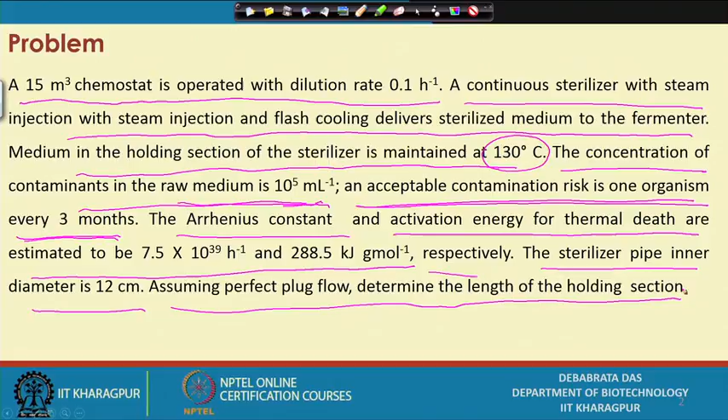So we can easily find out, since we know the flow rate, how much organism out of how much organism will be allowed in this particular sterilization process. The Arrhenius constant and activation energy for the thermal death rate constant are estimated to be the two values given respectively, and the sterilizer pipe inner diameter is 12 centimeter. Assume perfect plug flow and determine the length of the holding section. So this is the problem given, let us see how we can solve it.

As I pointed out before, when we try to solve the problem, first we should jot down what parameters are given. This is the volume, 15 cubic meter, dilution rate is 0.1, the Arrhenius constant is 7.5 into 10 to the power 39, the deactivation energy required ED is 288.5 kilojoules per gram mole, temperature is 130 degrees centigrade, and diameter of the tube is 12 centimeter. We shall have to write down all these things.

Now if you look at the dilution rate, how do you define it? Dilution rate equal to F by V. So F equal to D into V, am I right? This is already what is written here. So from D, the dilution rate, and the volume, we can find out the volumetric flow rate of the liquid. Now the linear velocity, how can you calculate it?

Suppose in the pipeline this liquid is flowing at 1.5 cubic meter per hour. If you know the cross sectional area A, and divide by A, what will be the unit? Meter per hour. That I can do. So this is exactly what we have done.

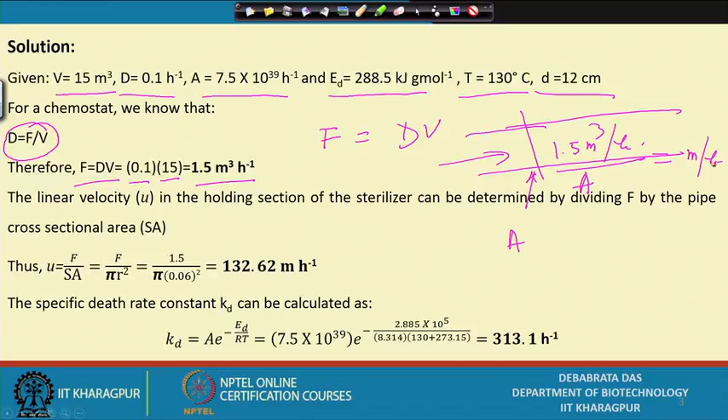This is the flow rate, and this is the cross sectional area, pi r squared, and the diameter is 12 centimeter, which is equal to 0.12 meter, am I right? This is in cubic meter, so radius will be 0.06 meter, squared, and your velocity is coming about 132.62 meter per hour. Now we know the Arrhenius equation.

What is the Arrhenius equation? Kd equal to A into e to the power minus Ed by RT. That is what is given here, am I right? A is the Arrhenius constant, Ed is the deactivation energy requirement, R is the gas constant, and T is the temperature of sterilization. So all parameters are given here, so we can easily calculate the death rate constant.

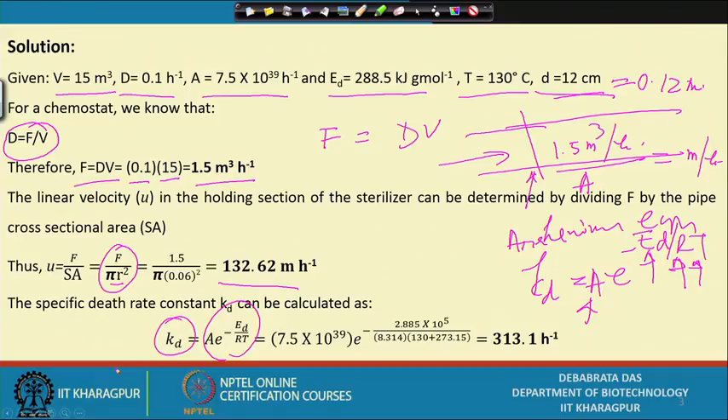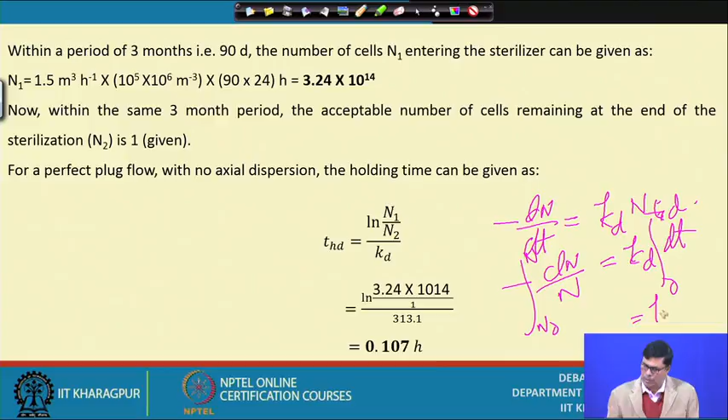Now once we know the death rate constant, we know the equation that we have: dN by dt equal to kd into n, am I right? So this is dN by n equal to kd into dt. So this is n0 to n, and this is 0 to td, or the holding time t. So we can write this equal to kd into t, and we can write ln n by n0, and this is minus. So I can write ln n0 by n equal to kd into t.

So time will be what? Time equal to ln n0 by n divided by kd. So this is what we have written here.

So first we shall have to find out what is the value of n0, am I right? How can we find out n0? The 3-month operation, 3-month operation means how many days? It is 90 days. 90 days, how many hours will be there? 90 into 24 hours, and the flow rate is 1.5 cubic meter. So if you multiply by this, you will get how much volume of the liquid we shall have to sterilize, and from that, knowing the concentration of organisms, if you multiply, we will find how much total microorganism is present in the media in a 3 month period.

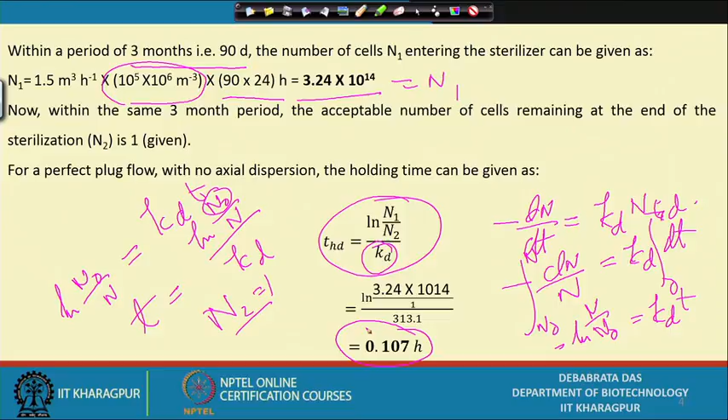So this we can consider as n0, am I right, or n1, whatever you have, and then we can put this value, and out of 1, n value will be 1. n1 value is this, and this kd value already we determined. So we can easily find out what is the time required for the sterilization, the holding time required, that we can easily calculate.

Now, our problem is something different. We are injecting the steam. This is media, and here is the steam. Then it is coming to the holding section. This is the holding section, so question comes here.

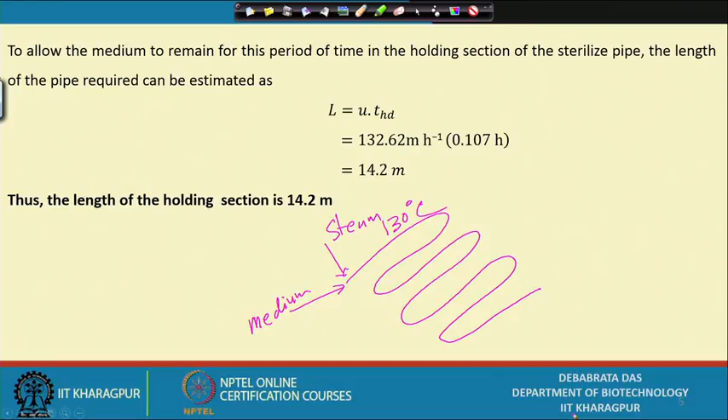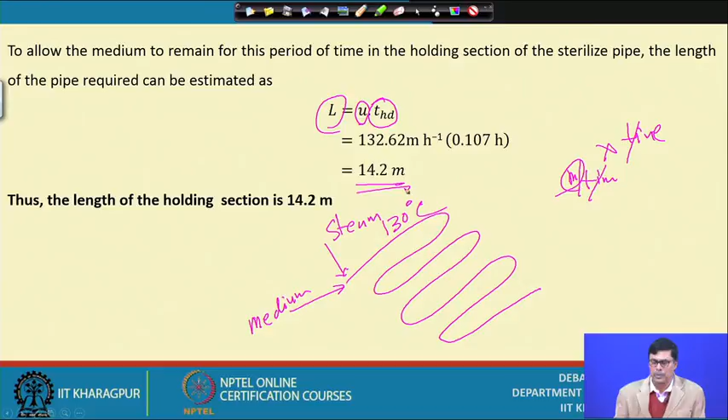This holding section, we want to maintain the temperature at 130 degrees centigrade. Now the question comes, what should be the length of this holding section? We know the velocity u, and the time required in this holding section. Velocity has units of meter per unit time, and if you multiply it by time, the time will cancel, and we will get the length of the holding section. So we will get about 14.2 meters. Very easily we can find out the length of the holding section of a particular sterilizer.

Now let us go to another problem. I think if you look at this problem, your conception will be a little better. The media at a flow rate of 2 cubic meters per hour is to be sterilized by a heat exchanger with steam in a continuous sterilizer. The liquid contains bacterial spores at a concentration of 5 into 10 to the power 12 per cubic meter. The activation energy and the Arrhenius constant for thermal destruction of these contaminants are 283 kilojoules per gram mole and 5.7 into 10 to the power 39 per hour respectively.

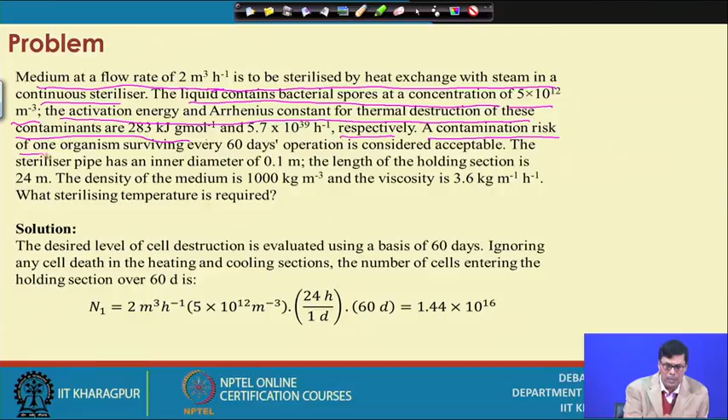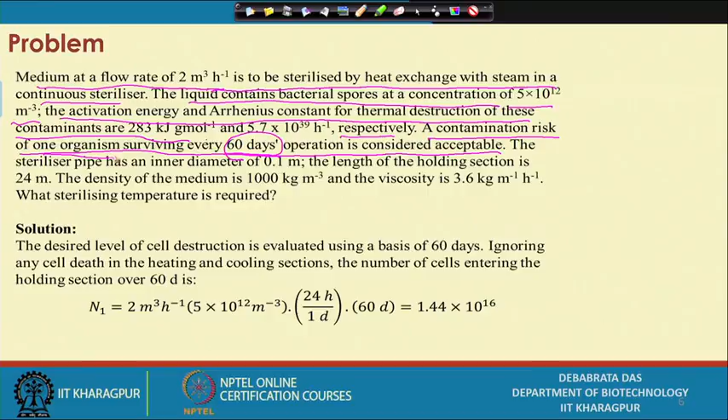A contamination risk of one survival every 60 days of operation is considered acceptable, because in the last problem we had 3 months, and in the last problem we tried to find out how much population is there. With 3 months operation we did it, and this is similar, but with 60 days. So a contamination risk of one organism surviving every 60 days of operation - every 60 days we are allowing one organism to percolate through the sterilizer, and the sterilizer pipe has an inner diameter of 0.1 meter and the length of the holding section is 24 meters.

In the last problem, you can remember, we tried to find out what is the length of the holding section. Now here the length of the holding section is given, 24 meters, and the density of the media is 1000 kg per cubic meter, same as water, and viscosity is 3.6 kg per meter per hour. What we shall have to find out is the sterilization temperature required for sterilizing the media. So this problem is a little different compared to the previous one.

Now let us see how we can do that. The desired level of cell destruction is 60 days. So like previously, we have 60 days of operation, and what is the flow rate? 2 cubic meters per hour. Now 2 cubic meters per hour means you have to find out the flow rate per day. 1 day is 24 hours, so if you multiply by 24 hours, you get meter cube per day. Then you multiply it by 60 days, you get how much cubic meter of liquid you are handling. And this liquid has a microorganism spore concentration of 5 into 10 to the power 12. If you multiply that, you get the N1 value as 1.44 into 10 to the power 16.

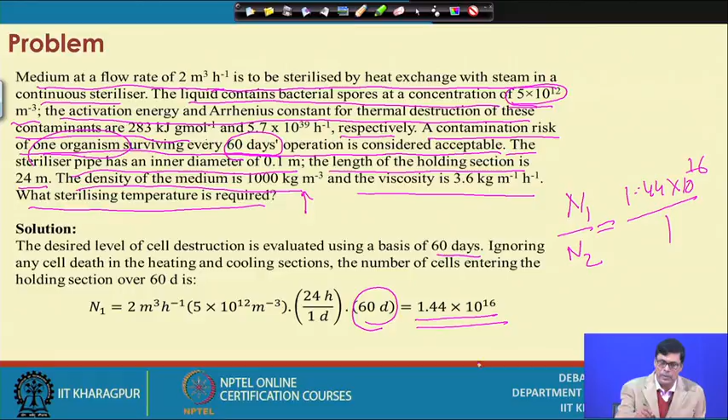Now if you want to calculate N1 by N2, what will this be? This will be 1.44 into 10 to the power 16 divided by 1. So the ratio is like this, and we can easily find out the ratio between N1 and N2. Here it is done the other way, N2 by N1. So you divide by this, and we get the ratio as 6.9 into 10 to the power minus 17.

Now the question comes, the flow rate is given as 2 cubic meters per hour, and the diameter of the tube is also given as 0.1 meter. So U equals flow rate divided by area. The flow rate is 2 cubic meters per hour, and area is pi r square. If 0.1 meter is the diameter of the tube, the radius will be 0.1 divided by 2. If you do that, we get 254 meters per hour. This is the velocity of the fluid.

Now if you know the velocity of the fluid, we can calculate the Reynolds number. What is the Reynolds number? d u rho by mu. So you know the diameter of the tube, the velocity of the fluid, the density, and the viscosity. So we can easily calculate the Reynolds number.

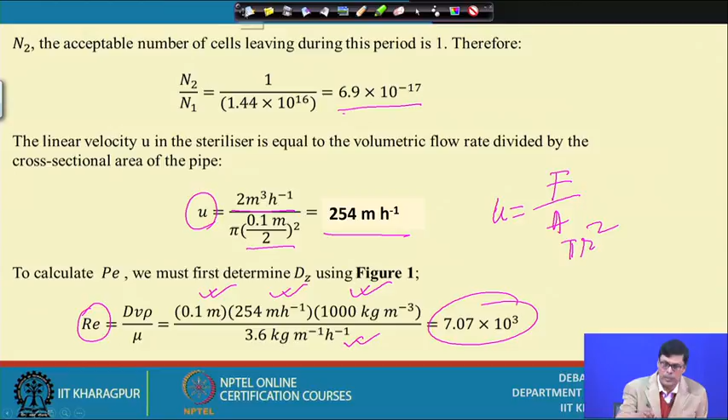Now, if you know the Reynolds number, then we can find out the respective value of dz, which is dz by u d. Now dz is the axial dispersion coefficient, am I right? U is the velocity of the fluid, and d is the diameter of the tube. So you know that this you can easily find out, the respective value you can find out.

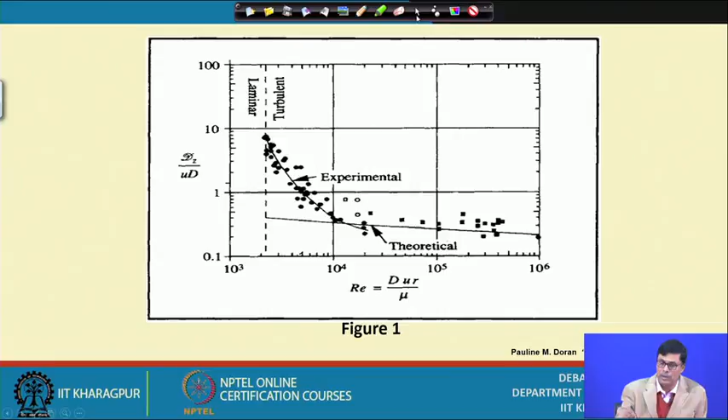This is what we have done here, that dz by this at this particular Reynolds number, something it is close to this, we shall have to find out where it is. We can find out this ratio, and once we do that, this dz value, the axial dispersion coefficient, we can easily calculate, and this will come about 16.6 square meter per hour.

And once you know that, then this is the Peclet number. What is Peclet number? U L by dz, where U is the velocity of the fluid, L is the length of the holding section, and dz is the axial dispersion coefficient. So if you put all these values, we will get the Peclet number. Now, once we know the Peclet number, then we can find out what we can find out.

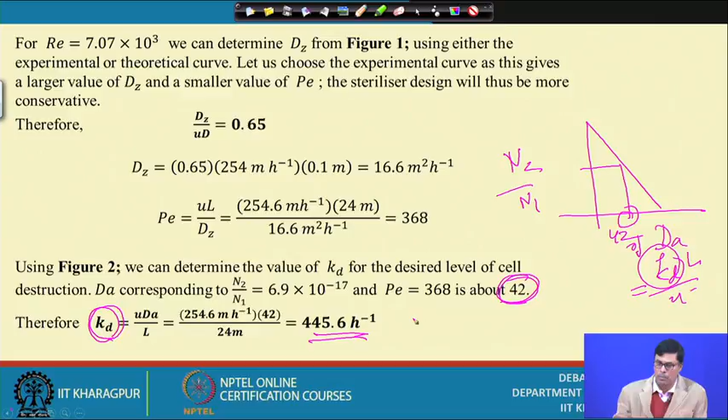Then let us use the Arrhenius equation. What is the Arrhenius equation? Kd equal to A into e to the power minus Ed by RT. Now, T equal to this divided by this, all values are given, you just put the value and you can find out like this. Now, another way, suppose we are unable to estimate the Kd value...

Now, we estimate the Kd value there, but we do not have the other values, that is Ed value is not there. Then if we have the correlation between Kd and T value, how the Kd value, with respect to temperature T, changes with respect to temperature, then if you know the Kd value, from the plot, from the graph also we can find out the temperature of sterilization. So this is the two ways we can find out the temperature of sterilization, it is not very difficult.

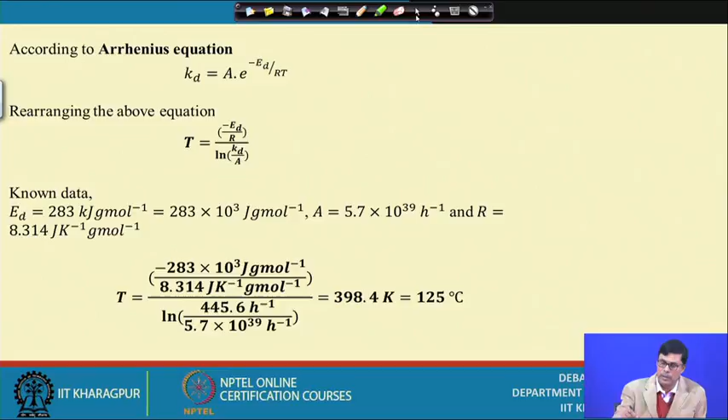So in this particular lecture, I tried to solve two numerical problems on medium sterilization. One problem deals with finding out the length of the holding section, that means how long you want to maintain the temperature of sterilization, and here the temperature of sterilization was 130 degrees centigrade. The next problem deals with how you can find out the temperature of sterilization. And also, if you know the temperature of sterilization, we can also find out how much heat is required for the sterilization process, because that also we can estimate.